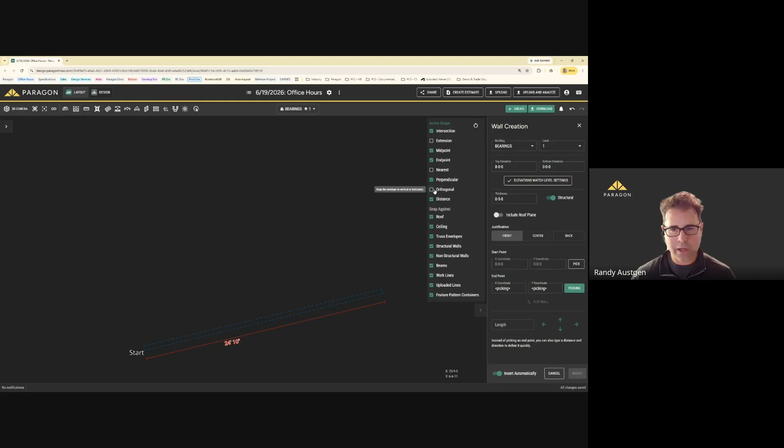So we'll get started by just creating some walls. And note here, there's a lot of new functionality with what we're looking at today. And we can see that when we start with a wall input or a beam input, it comes in having the start point anchored. I happen to be in ortho, so you can see me pivoting. We've got the dimension here on the active dimension. So if you just want to go to 15 feet and snap, you can do that.

But we're going to free form some of this, or just kind of create some walls just for the sake of today's session. And I'm just going to start off by doing some conventional wall input. So I'm hitting the right arrow key on my keyboard. That's going to take me to the right, and we can see it just input that automatically.

And what I'm going to do next here is I could keep drawing these things in, so that's all good. I can turn that off, and now I can say I want to go up 10 feet and enter. I can take this left 30 feet, enter. So that is the direction and distance. That's what I'm doing, and that requires an enter key. So down 5, enter, and so on.

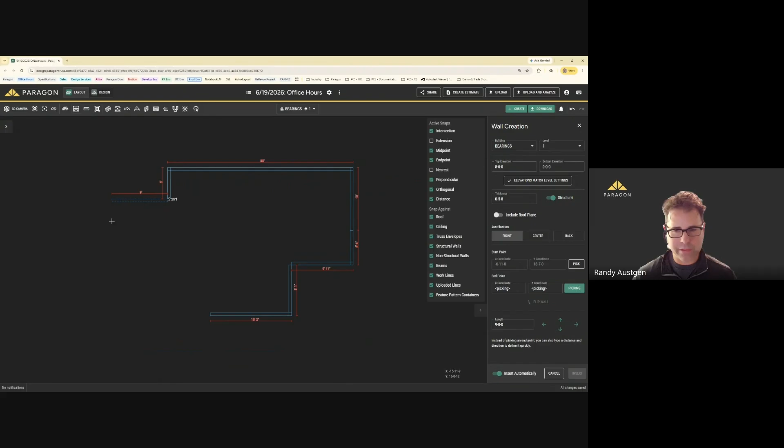Okay. The next thing that I'm going to do here is to turn on the insert automatically. And this is going to change workflow a little bit. So here, notice I have the values populated in the length field. And I'm typing on my keyboard 20 feet. And as soon as I hit a direction, such as the left arrow, it's going to place that. I can do 20 feet and hit the down arrow, and it's going to place that.

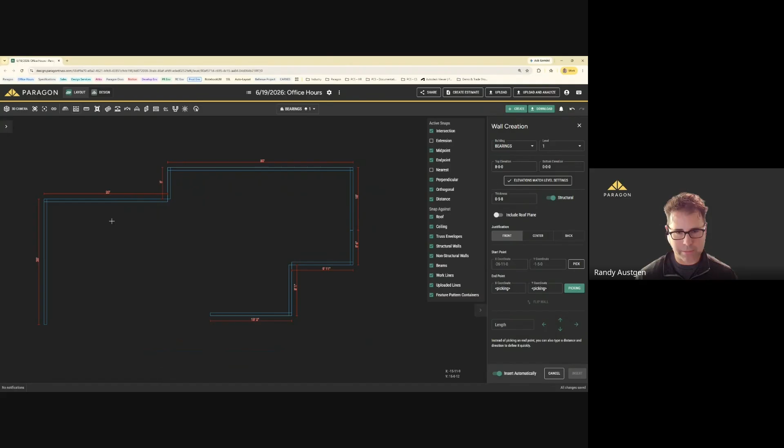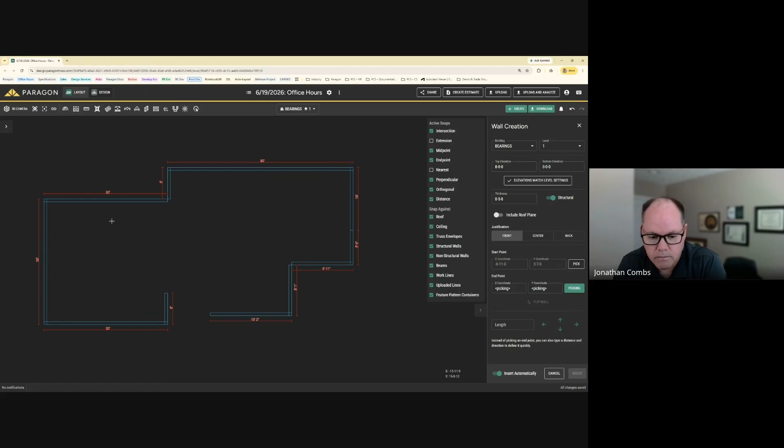A note to add there with Randy, as soon as he starts typing, that length box becomes highlighted, and the values you start entering go in that box itself. You don't have to click in there, you don't have to tab, you don't have to press enter. As soon as you start typing, that length box is filled with the value that you're typing in. And then as soon as he presses the arrow key, both of those pieces are satisfied with a length and a direction, and that then sends that wall or the item that you're creating in that direction with the value that you entered in. Great point. Thank you, Jonathan.

All right, so now we've got just a hodgepodge of walls here. This is messy. Here I'm going to actually make use of the snap points. I can hover above here, snap there, and so on. So that's all good. And I clicked escape once. Okay, and you can see that it relieved my cursor from that previous endpoint, and now I could start somewhere else. All right, so that's a huge step in the positive direction here.

I hit escape again, I can come up here. I can pick, so those are a couple big items there. If I hit escape again, it's going to remove me from the entire input session. I'm going to do that again here, and there you have it. Next I'm going to re-enter wall input mode. I'm going to turn off those dimensions.

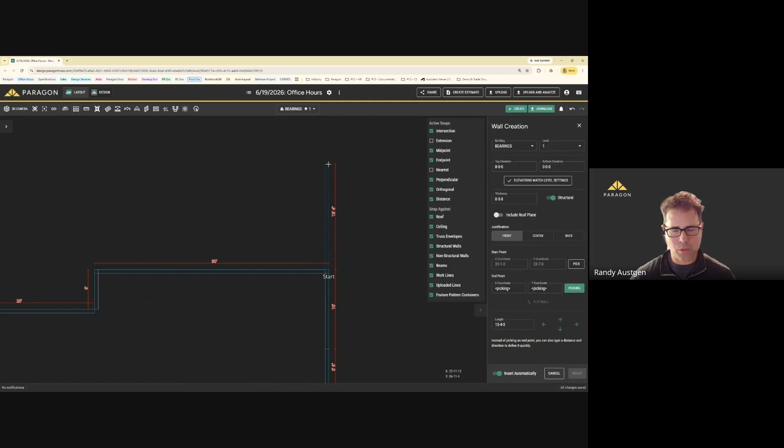And I'm gonna just drop in a few walls up here, just free form. And next I'm gonna hit Control Z to undo, and you'll see what happens here. So undo, it's gonna remove that last point. I'm gonna undo again, take me back to that previous point, undo again, it's gonna take me back to that origin. So some additional improvements around that.

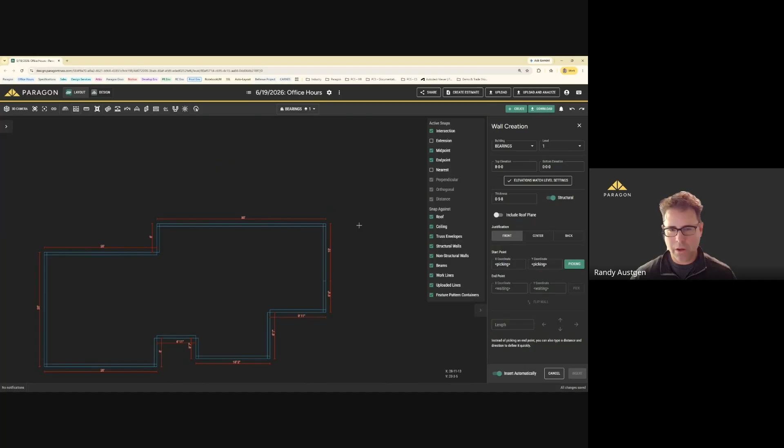All right, I hit escape. I'm gonna escape again, and that's going to get me out of the wall input mode. All right. The next thing we're going to touch on, we're going to drop in a few bearings, a few beams. We'll do some drop beams and some flush beams.

And in order to have kind of a snap point for my beams, I'm just going to extend this wall through. So as existing users know, we've got the ability to trim and extend. There's a really nice hotkey for that. You hold down Shift on my keyboard, and I can hit a cutting edge. Here I hit that as the cutting edge. So that's pretty cool. I'm going to undo twice. That was Control Z, Control Z.

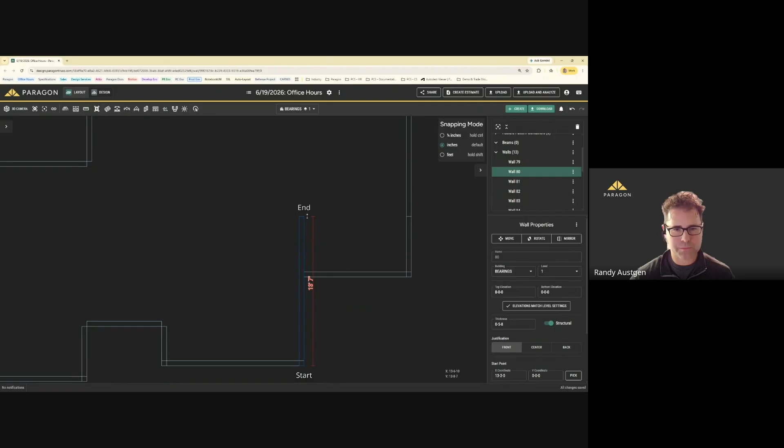And there is some new functionality here that was recently introduced, and that's going to allow me to stretch the end of a wall. You can see I use this reference point there, right? And it's recognizing that. Breaking that up, it's recognizing that, and so on. So you've got a few tools at your disposal.

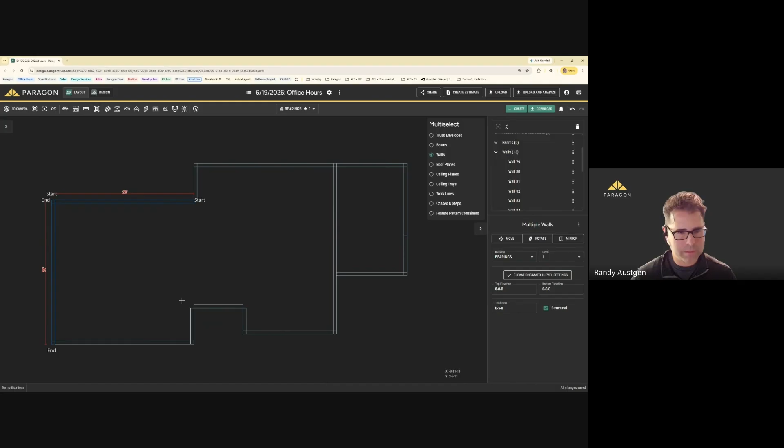And actually, before I go and put in the beams, I'm gonna show this other one here. It's these interactive editing tools. So we just showed how to extend or stretch a wall, if you will. What we're gonna do next here is we're gonna take those 1, 2, 3, 4, 5 walls, and notice the cursor is going to change from the crosshair to a move. And what this is going to allow me to do is to move chunks or multiple entities, one or more entities, objects. I can just move them freeform.

Now it's freestyle, and you say, what's the use case for that? Valid question. But what I can do here is I can actually go and piece these things together. See all of those different references? So I have these snap points all over the place. So I could do this and so on. So I think that's pretty neat. I'm going to actually align those, and then I can clean these things up. Again, using some modification commands. So again, really easy to clean things up there.

All right, back to where I was going, which is beams. So we're going to put in some drop beams. Here, let's call this a front porch or something like that. So we first define the beam type. It's a drop beam. The top elevation is at 8 feet, which is where I have the top of the wall. If I wanted that beam to be 1 foot, I could do that. We have plies and thickness as well. So if you don't want to do the math, and you've got a 1 3/4 inch, a 3-ply like LVL or something like that, you could do that.

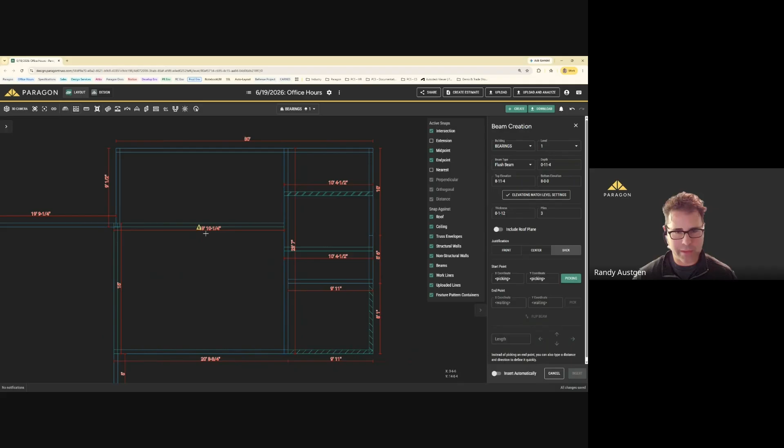Okay. So I'm actually going to get rid of those 2 beams that I just dropped in. I'm going to drop that. And let's take a look at this in 3D. So we've got our drop beams here. We've got our flush beams there. We've got additional visibility controls. We can see now we have control of beams, solid beams, and hatched when you're in 2D.

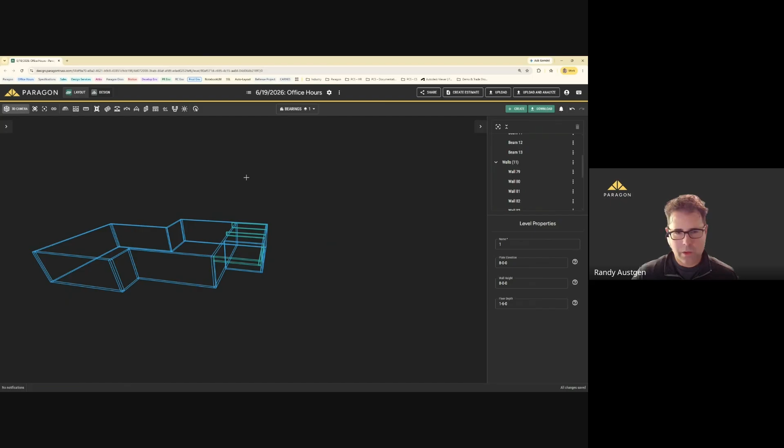And then the walls, I'm not sure if 2 months ago this was available or not. We released this relatively recently, but we have different visibility and controls for load-bearing walls or structural walls versus non-structural walls. All right. All right, I'm gonna reference my notes here, folks.

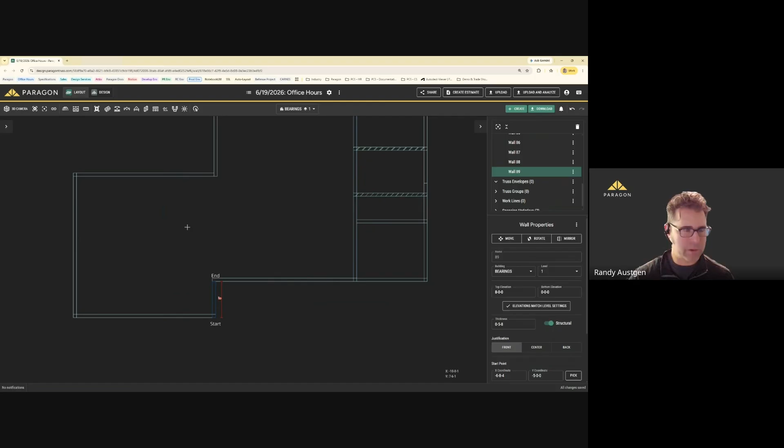And again, I mentioned this in the intro, but instead of having the left point and the right point, we now have start and end for our walls and our bearings. We touched on the length and distance versus being able to snap, using direction, distance, and hitting the Enter key versus doing the insert automatically. We reviewed the Escape key, how to really navigate around the model quickly using the Escape key to release your snap point or to exit the input or creation session. Undo, some big improvements with undo, and then we've got our flush and drop beams.

Okay, so before we move on to our next topics, do we have any questions around anything that you just saw there with bearing input, and by bearings, walls and beams, flush and dropped?

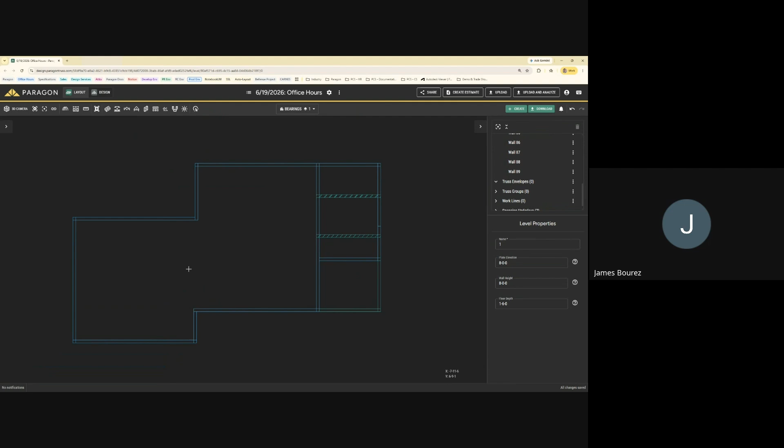James. Yeah, when you have a building that has multiple elevations on the same floor, we have a lot of 2-story houses that have all kinds of different plate heights. When you're putting in the bearing, when you're doing the level elevation, you have a certain plate height on the level, then you have multiple different heights with the walls. What is the best way to put that in? Do you want to put the lowest ceiling height for the level?

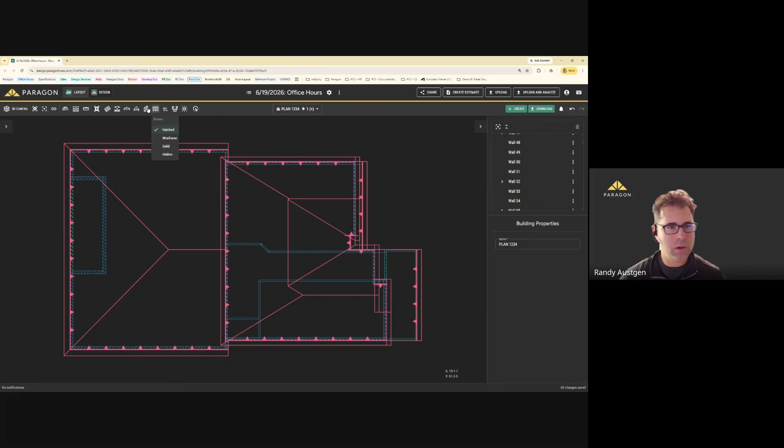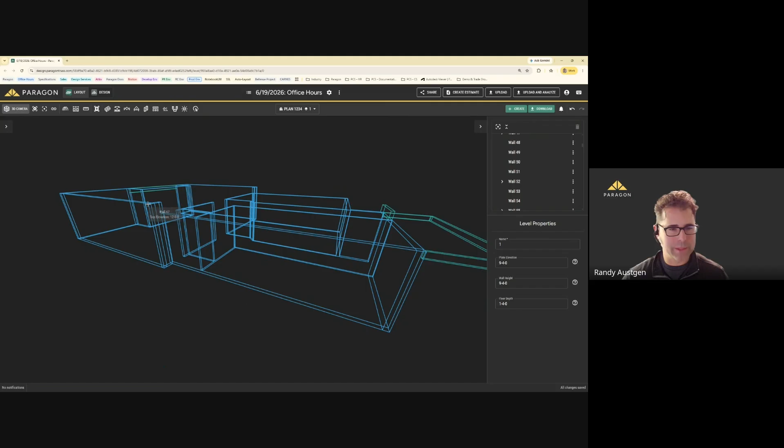Yeah, what I would typically do, and I do have a multi-level building over here. I'll try to not let us get too far into the weeds here. I'm gonna hide the stuff we don't care about right now. But what I would do is I would define the level plate elevation as the most common on that level. So that's what I would start out with. Actually, this is a good example. I'm gonna turn off those feature pattern trusses too. So this particular layout we've got some 10-foot walls, 12-foot walls. We've got 12-foot walls over here, and then the majority of them are at 9'4".

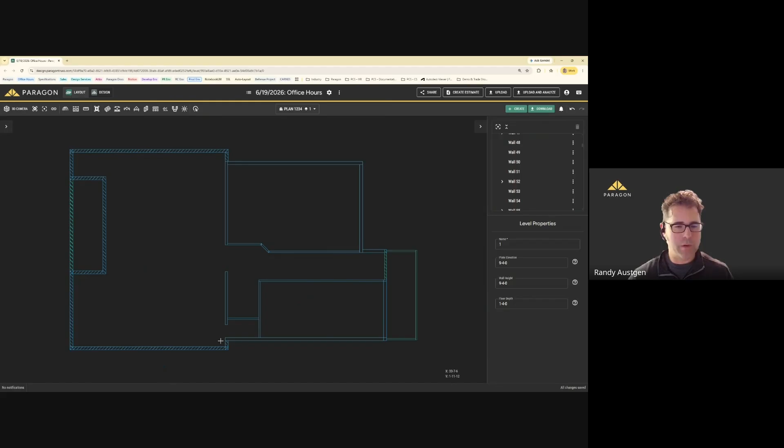So what I've done here is I've defined the level properties with a plate elevation of 9'4", and again, you'll find what is most efficient for you. What is most efficient for me is I will put all of the walls in at 9'4", and then I'll go back through and select the walls that need to have a different plate height. I'll just select them and then change the property. That's what I find most efficient. And then viewing it in the hatching visibility allows you to QC yourself and just double check.

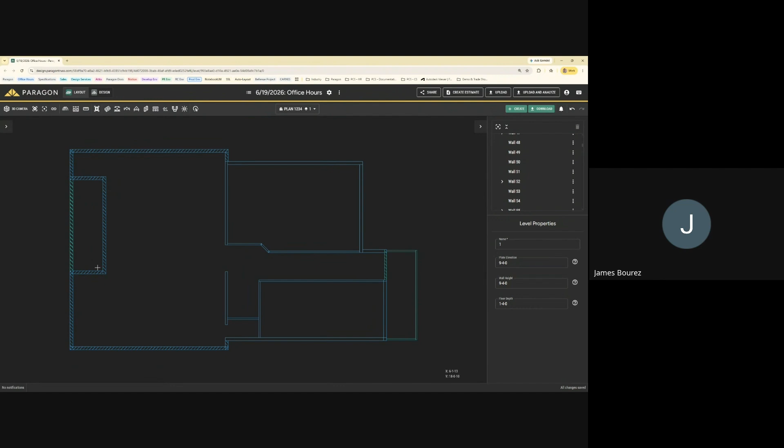Okay, and you select multiple with the Shift key? Control. So, no, I do not have Control selected right now, and you see what's happening? I hold down Control, and there you go. Notice it didn't select that beam back here. Okay. Thanks. Yeah, absolutely. Great question. All right, any other questions here before we pick back up?

All right, keep them coming. Next, we're going to look at some of these smarter snapping controls and snap settings. And I gave you a little preview of the interactive editing, but we'll cover that a little bit more here.

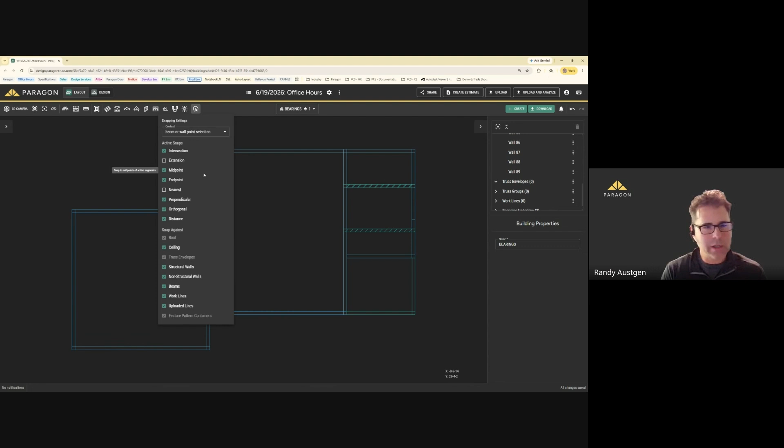All right, so snap settings. We have a new snap setting icon up here. So what does this actually mean? So the snap settings are, I don't know if you call them, kind of predefined contextual snap settings based on what command you're in. That's the contextual part.

So the active snaps and the snap against should look pretty similar to whenever you're in any type of input mode, right? We're used to having these come up over here. But what these are, so again, I'm in wall creation mode. These are contextual. So I'm in beam input mode, wall input mode, I think, wall creation mode. And we can see there are these different, I don't know if you want to call them styles or preset groups that just predefine what snap settings are available and possible.

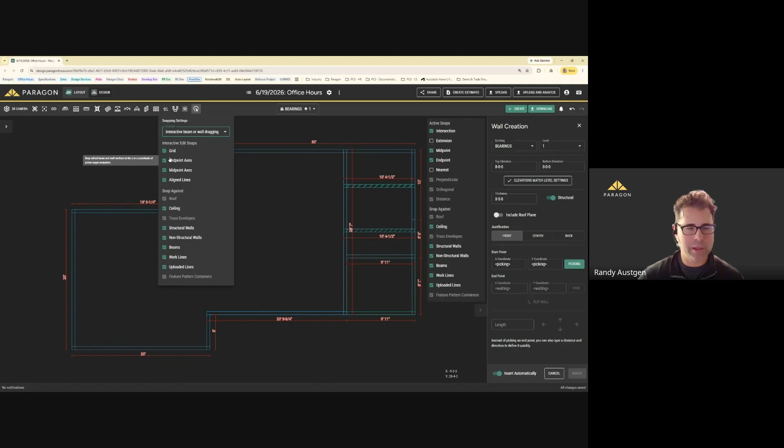All right. So I encourage you to work within this area. I'm going to show you an example. And this is going to be for when I'm in an interactive beam or wall dragging mode. This is the type of thing that's going to be available. I'm going to select the grid, and I'm going to do this in 2 stages. Okay. So we're going to go back and do this thing. I had the grid. The grid is available as snapping options.

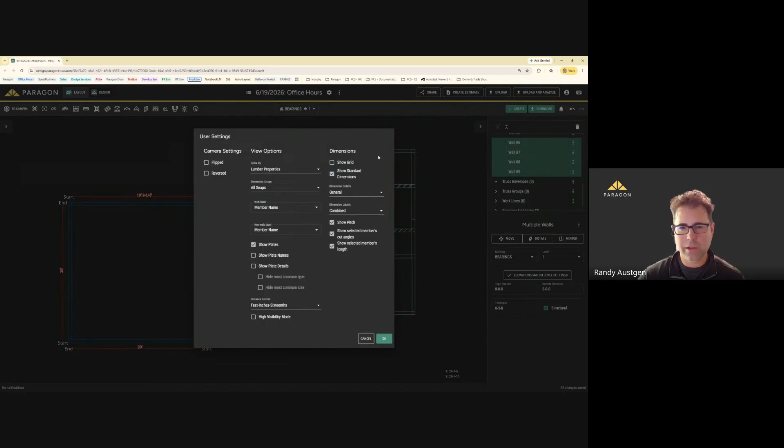So it's going to be a little tough to see here, but I'm going to actually turn on that grid, and maybe it's going to be a little easier to see. So if you can see, I'm trying to move my mouse incrementally, and it actually finds a snap. So it's snapping to that grid. Okay. Versus if I turn off the grid, and now it's not snapping.

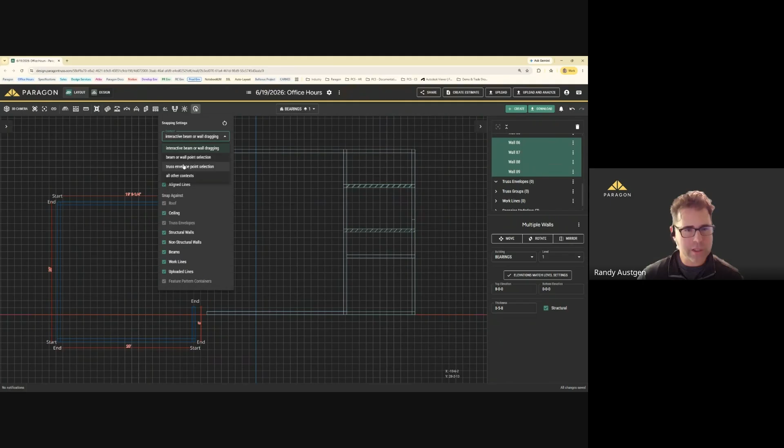All right. So that type of functionality is going to be available to you depending on, I don't know if you call it mode or what context you're in. So I'm in interactive beam or dragging mode, and then we've got the beam or wall input or insertion, creation, truss envelopes as well. And really the intent behind this is that it provides you more control to help you quickly find the snap point that you're looking for and reduce the opportunity to inadvertently snap to something.

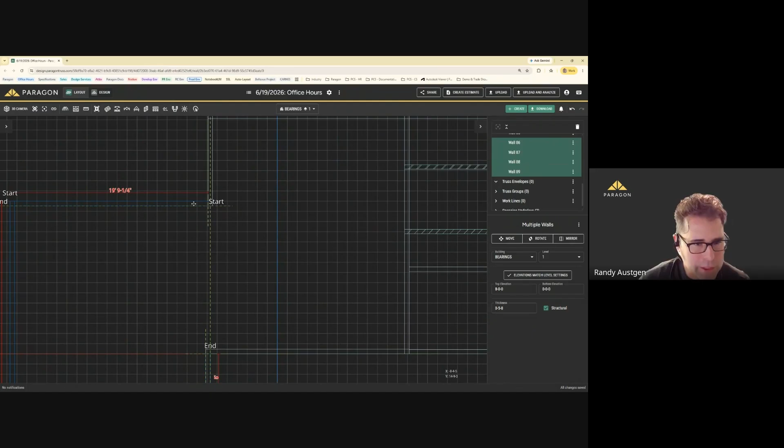All right. So there we are. Let me see if I can get that a little tighter there. And then we're back to where we were before. Personal preference, but I prefer working with the grid off. I find it a little noisy in the day-to-day.

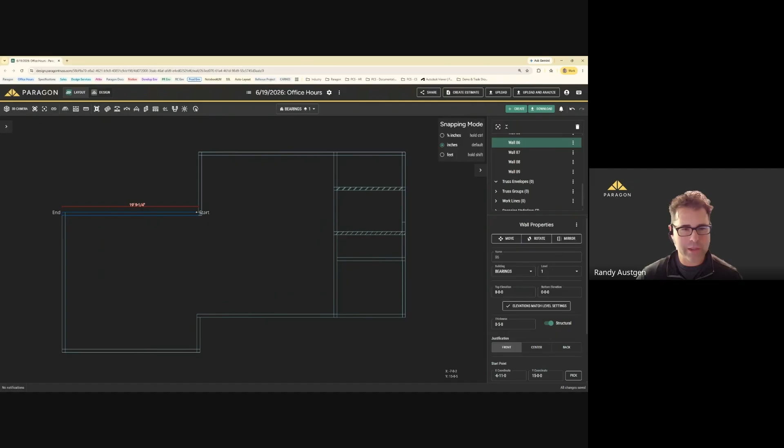All right, so I touched on a little bit with the snapping. Again, I showed this before with, I'll say, the stretching, adjusting wall lengths, and you've got that active dimension. So that's pretty neat. Adjusting a wall position. Again, I can move this down. I'm going to see if I can actually get this to align.

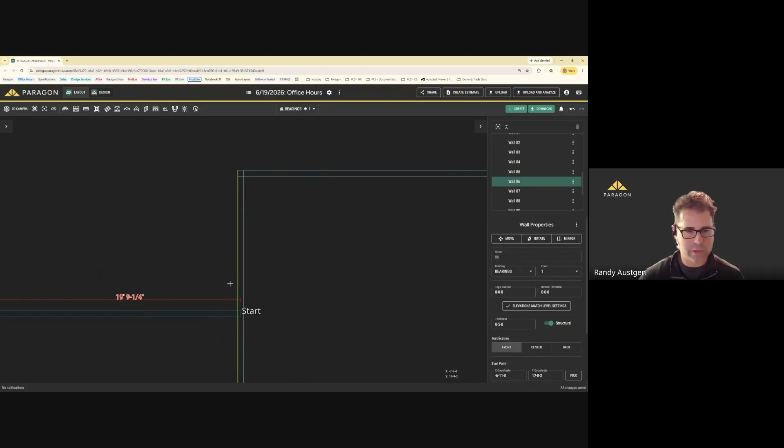Oh, having a hard time getting that to align, but really, I'm gonna scratch this itch of mine. Because I'm crazy, I need these things to align exactly. And so I can move that over. Again, I'm just freestyling a few changes here, 0 to 12. And then you could select this one, either drag. I'm going to select this one and trim it. So holding down Shift and trim, and so on.

All right, so a lot of great tools, and you'll find in some situations using the extend by shift clicking is going to be faster or more efficient. Dragging might be in some cases. Here we go. I've got 2 walls selected right now, and I can extend those through. What I haven't tried, this could be fun. I was wondering if that was going to adjust both walls. It does not. And there we go.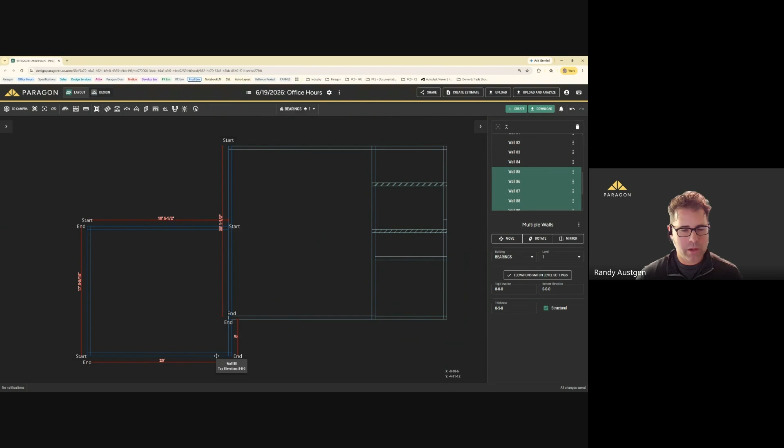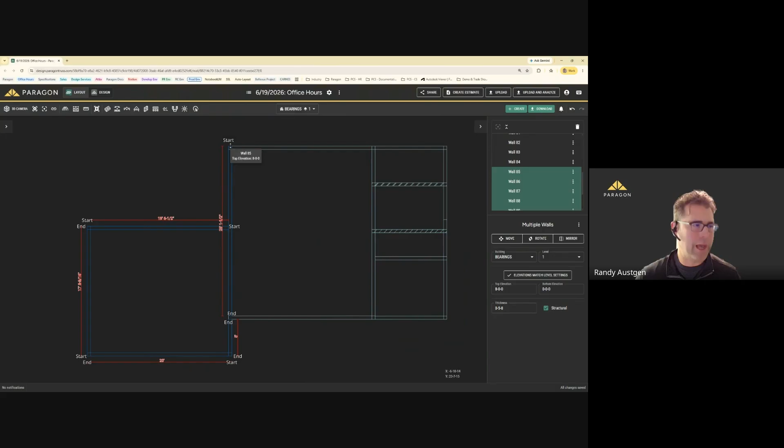So again, I encourage you to explore some of the different tools. Multiple ways to do certain functions, such as moving those walls, extending the walls, but you'll find what works best for you and your specific scenario. One word of caution I have with these interactive editing tools is be very mindful of the cursor type. Right? So when I'm in a standard mode, selection mode, etc., I've got just the crosshair cursor, but as soon as it changes to move or to stretch, if you left click, things are going to happen. All right. So a word of caution there.

Okay, so again, we covered the smarter snapping controls, the customizable snap settings, allowing you to snap to certain objects, etc., and then the interactive editing. All right, any questions around that?

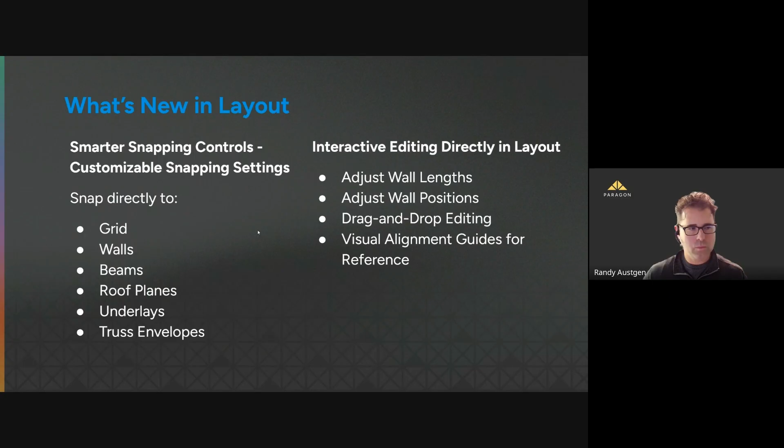Okay. All right, a few new items. We've had a long-standing request in our development backlog to make work line input more efficient, and so we're going to be covering that. We've taken some of the best things from the reference line workflow within design mode, and we've implemented them within layout as an initial implementation, an initial step.

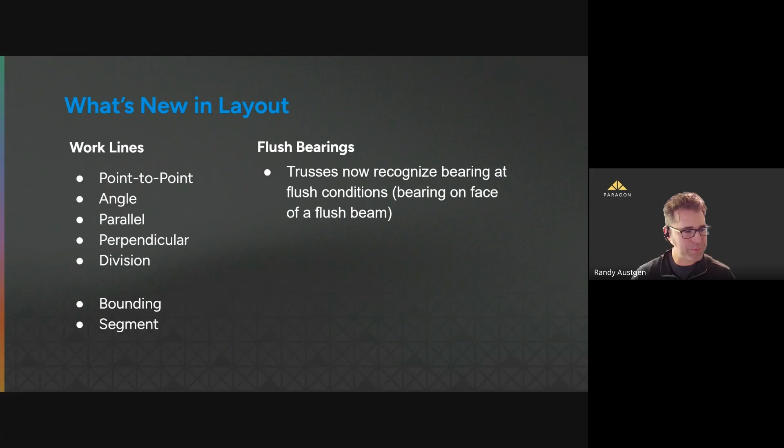There's certainly some more opportunities to improve and refine the work lines in layout, and we're going to be taking advantage of that, and you'll see continued changes with work lines to make it smoother, fewer mouse clicks, those types of things. We'll go ahead and explore some of those. All right, so as with our typical workflow, I'm going to right click and create a work line, or you can always go up here to the create option.

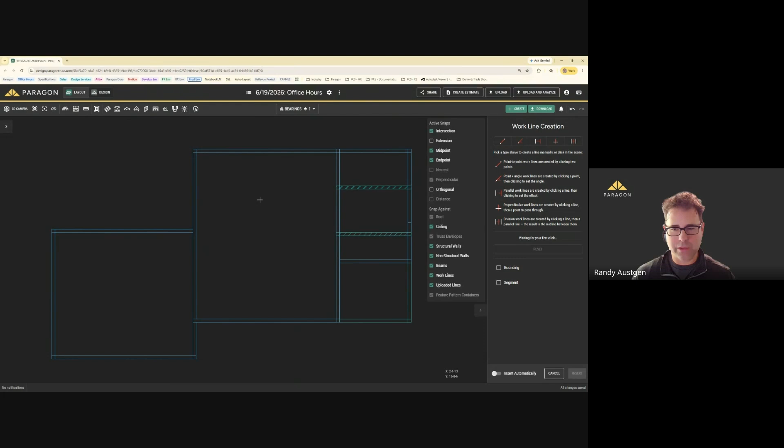So when you are now creating a work line, you've got a new dialog. The right sidebar, the right panel, is very different than it used to be. We've got these different modes: point-to-point, point and angle, parallel, perpendicular, and division line. So again, taking some of the functionality from design mode when you're putting in reference lines, and mimicking those here. With any of these input types, you have the ability to use bounding, and some of them you can use segments. I haven't selected anything over here yet.

And note that I have these snap points. I can either define an edge, or it'll take me to a snap point itself. That's a midpoint intersection. And that allows you to get things kicked off without clicking any buttons. So here we are, I'm just going diagonal with a point to point. I could do a segment. This is going to get really messy.

And here we are, I just hit insert. Notice we also have the insert automatically here. So I'm going to do insert automatically, define a new start point, and I'm going to just go here, and it automatically puts that in when I click the endpoint. And so on. All right, so that's an improvement right there. We stay in a continuous input mode. It doesn't leave the work line command after you're done defining.

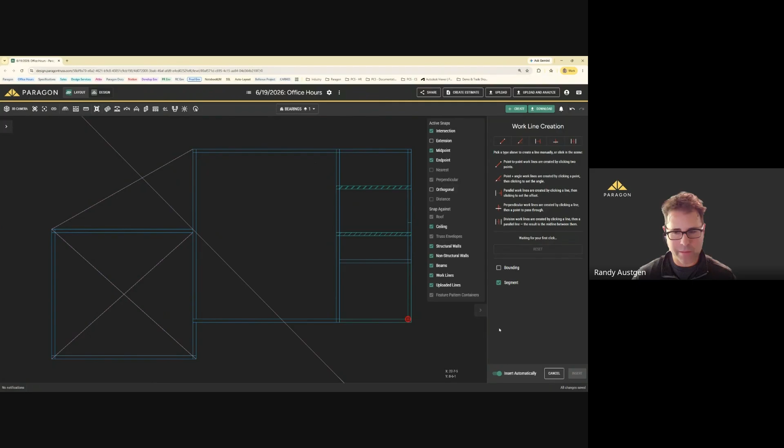All right, so next, let's go explore some of our tools. So that was point to point. We've got point and angle. Excuse me, it didn't get the point and angle, and I didn't even click that yet. So you can see you've got your angle here. So if I know I want to come down at a 45, there we are. I could just drop that in there. I'm in insert automatically, so just drop that in there. That's good. We've got our offset.

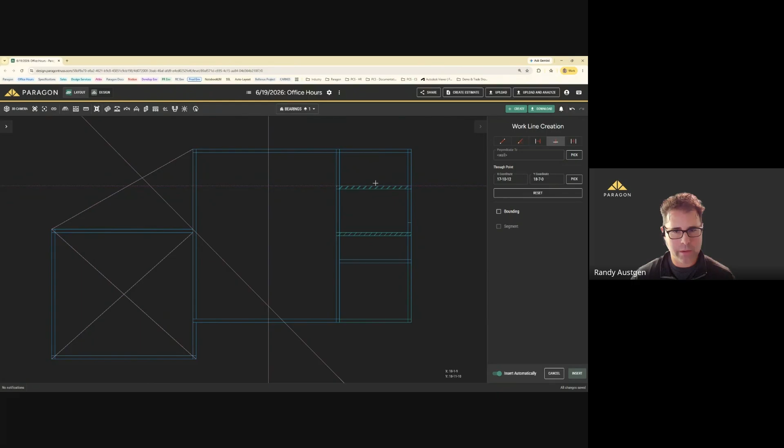So this is similar to what you're previously used to. We'll do some refinement where we're moving your cursor for you. So if you wanted to move this over 10 feet, hit the right arrow, and there you are. There's your line, and so on. All right, so we've got perpendicular. If I want to place a line perpendicular here that is in line with this beam, I can do that here and insert. There we are. So now I've got that line there.

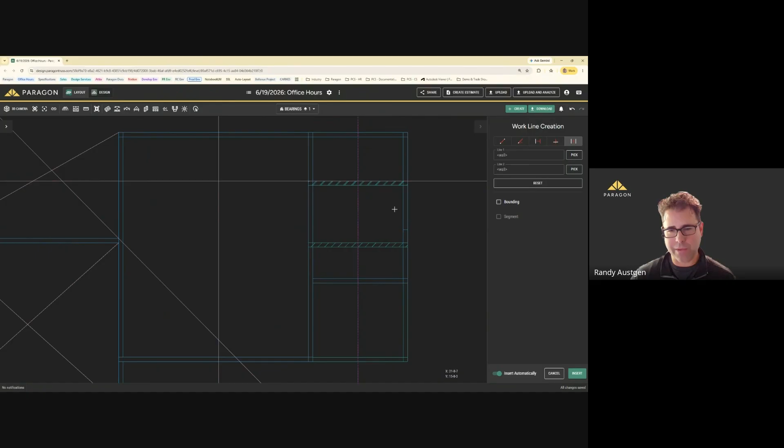And then we've got our division line. And this is borrowing the functionality again from design mode, where we're able to specify what kind of a start and end. And this is going to divide it in two. Again, in design mode, you're able to use the plus and minus arrows to determine how many divisions, if you will, to place work lines or members. And so that type of functionality will continue to be enhanced.

Okay. So there we are. We've got a whole bunch of work lines that I'm likely going to get rid of next. All right, so here we are, work lines, see you later. And the last couple things I want to do here with work lines, I'm going to use the bounding and segment to next demonstrate some of the flush bearing improvements. So I'm going to define bounding and segment. I'm going to define that here.

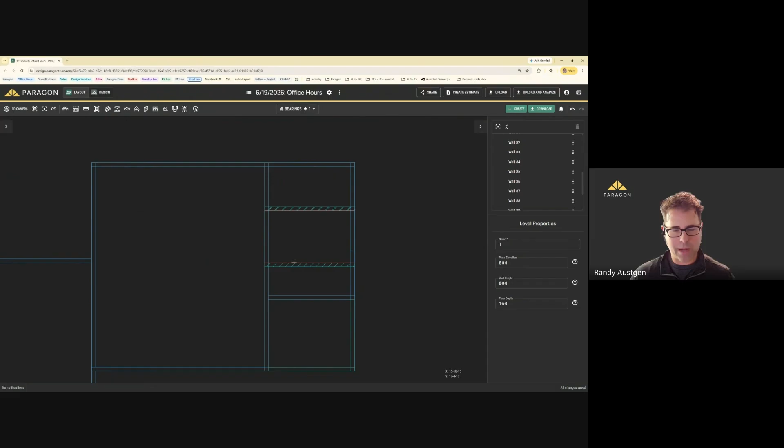And I'm going to do one more. And insert. Again, I can use the insert automatically, or the Alt key. Holding down the Alt key when you select an endpoint is going to keep you in that continuous mode. All right, so I've got my bounding and segment reference lines here at the faces of those girders, those flush beams.

All right, any questions on anything we just covered there or adjacent?

Okay. All right, for the next demonstration, I'm going to actually demonstrate some of this flush bearing recognition and improvement around there. So for existing users, it's long been a challenge where if you had trusses, for example, that were spanning between these two flush members, that it wouldn't recognize any bearings whatsoever. And therefore, you found yourself having to create false bearings and then editing those things when you're in design. So not ideal, several extra steps, and we have improved that, and we're going to continue to improve that as we continue to enhance functionality.

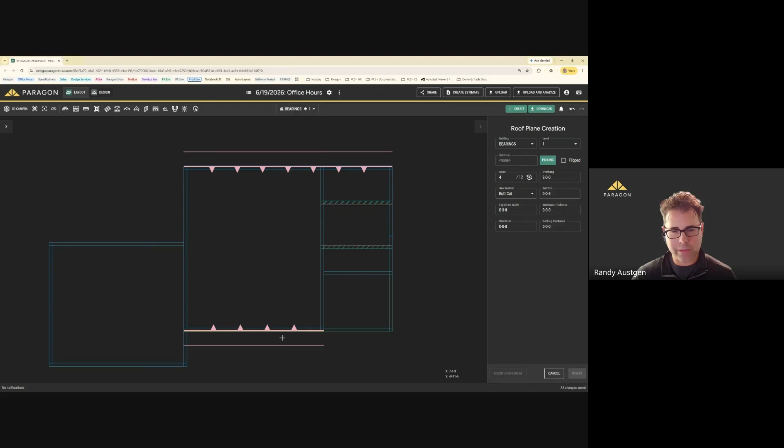So in order to demonstrate this, I could put in some floor trusses, but in this particular case, I'm going to drop in roof planes. I had mentioned holding down the Alt key when performing certain commands. I'm going to do that here. So I'm going to hold down the Alt key, and it's going to leave me in this continuous input mode. Coming back down here, there you have it. While I'm at it, may as well go here. Great. So I can hit escape now. And there are my planes.

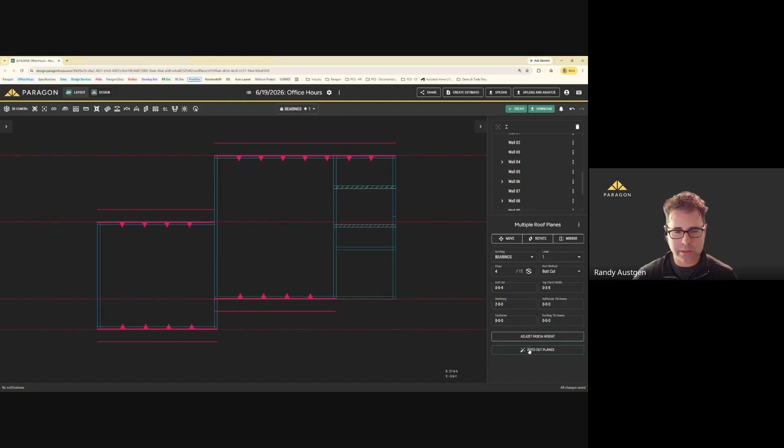We continue to make improvements around auto cutting. And this will be interesting to see how it interprets this. I don't imagine it's going to get it right the first time, because there's some tricky stuff there. So it did a pretty darn good job here. Got this, but we got that weird jog here. So I wouldn't expect it to get that dialed in, but it's pretty good. It did do a pretty good job. So I'm going to work with that for now.

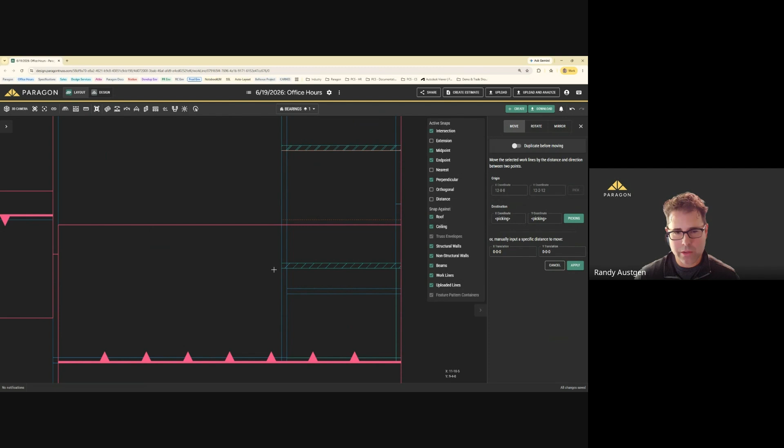I definitely don't like what is going on for this demonstration where I have that flush beam. So I'm going to use, again, some of those editing tools that we have. And I'm going to move this down. I'm going to move this one down. I'll put it right there with that one. There we go. Oh, I overlooked that. So we did not implement the work line movement with the interactive. That's just for walls and bearings. But what I can do here is I can move that work line now to that new location. So I'm just going to move that over here, and there we are.

All right, actually now I've got to change this, get that beam back over there, and I'm going to get these walls over there. All right, I'm going to drop in some truss envelopes. And let me make sure to turn those on. And there's my truss envelope. And notice it's being bound by the reference lines, those bounding reference lines on the face of those flush members. If I place it up here, it's still bound.

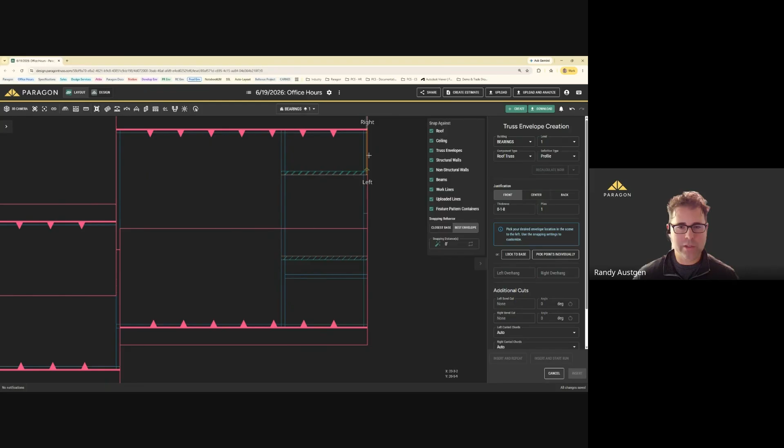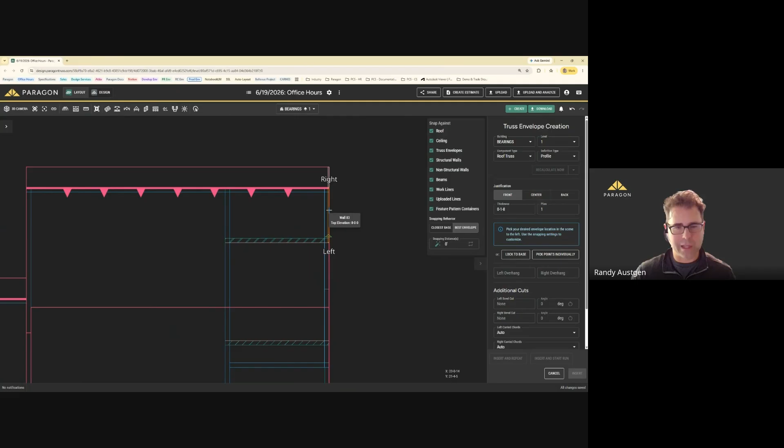Notice here that this roof truss envelope that I'm putting in does not automatically recognize the rear face of that flush member. So we don't have that 3D geometry detection yet, but that is something that we're going to be looking to improve. So make use of those bounding work lines to control that, or you could always place it and then use the trim, extend hotkeys, the shift select to finalize your left and right ends, etc. But the purpose of this particular demonstration here is to show off the new functionality of the flush bearings.

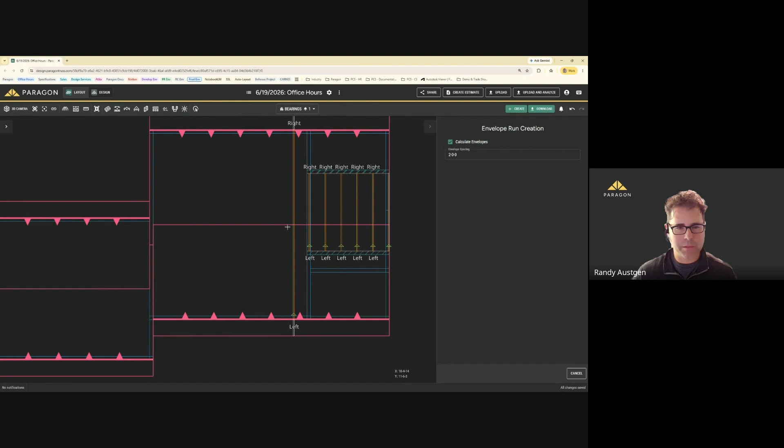So I'm going to just click there to place that gable. Having a hard time with my words today. I'm going to bring this out. And then look, as soon as it gets beyond those bounding work lines, it's now going to place these trusses on layout and so on. And I can keep this party going. All right. And there we have it. Again, if I wanted to continue to fill out this, I can do this, start run.

There we are. While those are selected, I'm going to get that gable and trim it back to that face. Here we are. Again, I'm just freestyling, showing you some ways to be very efficient. I'm going to use the mirror command. I'll mirror that about the ridge line. It's going to duplicate that existing. There you are. While those are selected, hold down the shift key, and there you have it. All right.

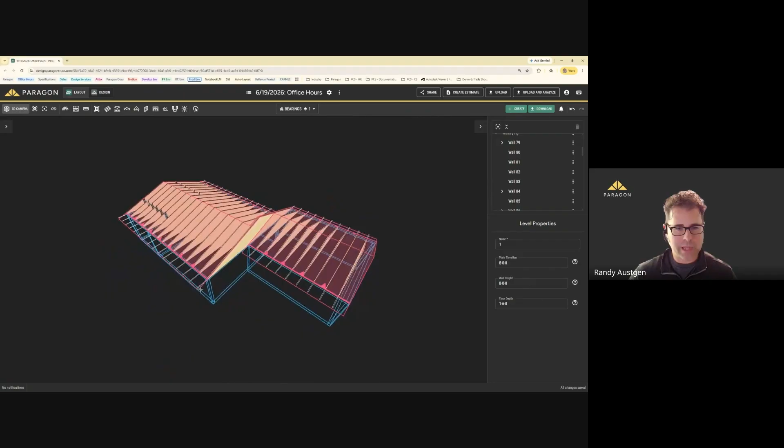Let's take a look at this in 3D. Oh, we'll take a look at that in 3D, and then we will end up designing those components at some point. But first, let's address James's question. James, what do you have?

Yeah, if you wanted full span trusses there, would it recognize the beams and put beam pockets in the trusses? Not with what I have right now. So currently, the bottom profile of a truss is defined by the bearing elevation. So defined by a wall, essentially wall or beam, and also ceiling objects, ceiling entities, right? So you've got a tray ceiling or a vaulted ceiling or even a flat ceiling if you step it up.

Those types of things. So it's not going to auto detect that in 3D yet, based on the 3D geometry yet, right? And the same thing applies to if you have a ledger condition, it's not going to automatically notch the end of that truss. But those are all things that we plan to improve upon to reduce the amount of additional plane cutting and plane definition and those types of things to automatically step up at that flush girder.

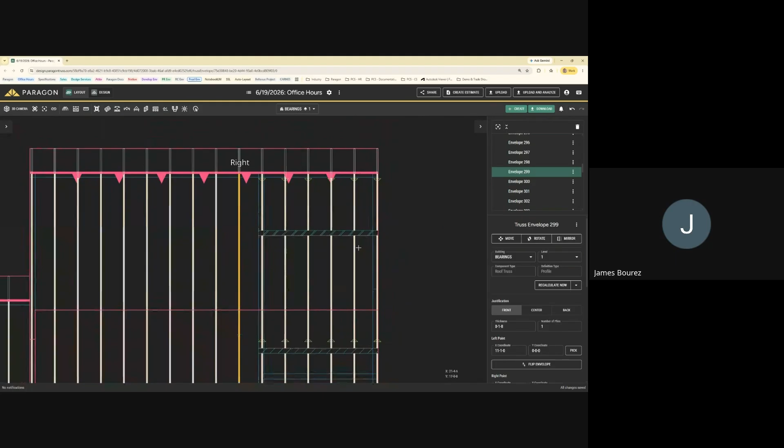So how would you do it now? Have to cut ceiling planes in the shape of the beam? You got it. So I would do something like this. I would put in a flat ceiling plane here, insert and repeat. I would put another one here.

And this is going to be fun. You don't have to do it right now. But... Wait, no, we're doing it, James. Oh, I missed that one. Let's go.

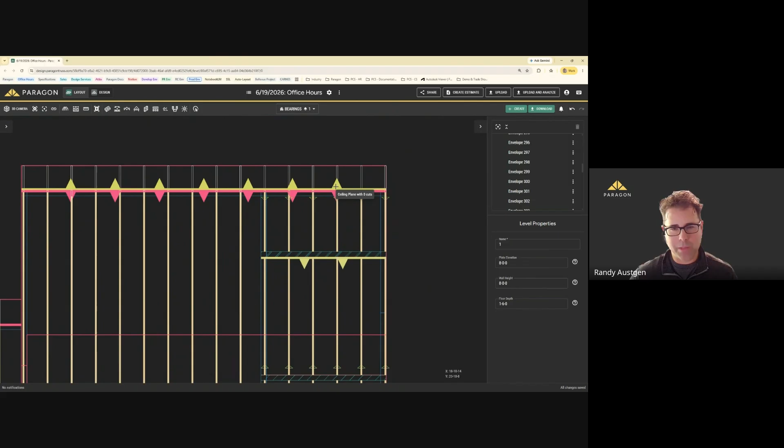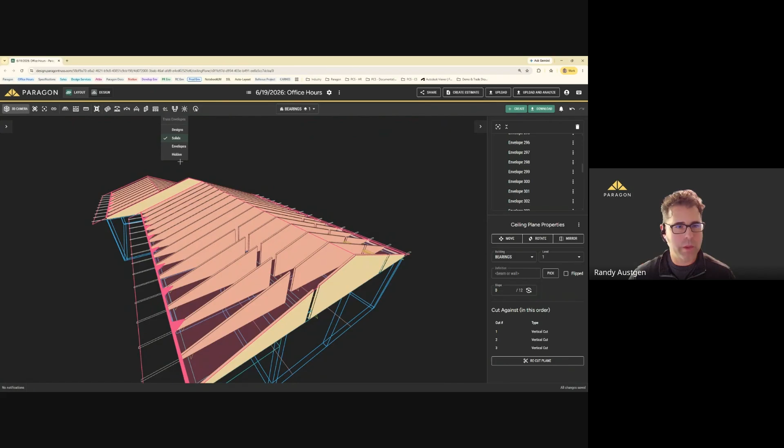So it really doesn't matter how I'm going to cut this thing in here, but what I do know is that I want to take this one and we'll cut that plane. I'll bring it up over. I'm holding down shift. Probably didn't need to do it at the gable, but work with me here. What I'm interested in is where it actually placed that, because it was a flush member, whether it placed it on top of that or on the bottom. This is great. That's exactly what I wanted it to do.

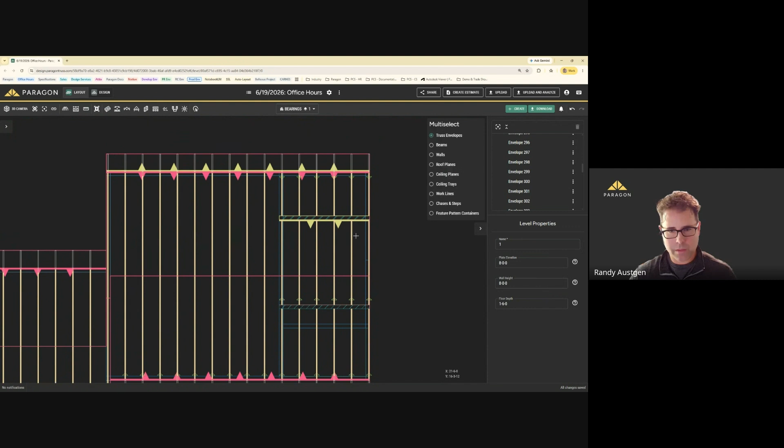All right. So now what I can do is we'll take that envelope and I'm going to do a solid. Come on, fella. Yeah, I'm going to leave a few of these in here. I'm just going to grab these and bring them on over. Okay. So that did not automatically pick it up, which I did not expect it to. What I can do here is I can take this, and it's going to be interesting to see if this works without a vertical ceiling plane.

And I want to add a series of bottom cuts. So adding bottom cuts from left to right, the triangles here on the truss will represent the left end. So I'm going to grab that 8-foot ceiling plane that I didn't cut and I didn't flip it, but it really doesn't matter.

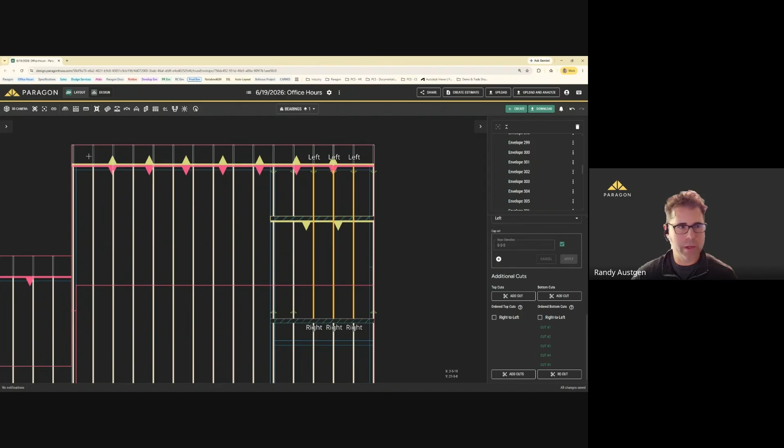So I can come here. I can hold down shift to come up that girder or that beam. I could click here to grab that raised section. I'm going to hold down shift, come back down 8 foot and finish. Let's see what happened. And there we go. Might be tough getting that one to pass. Although in reality, you got that flush beam that's actually supporting that. I am really curious as to what's going to happen when we generate these component designs.

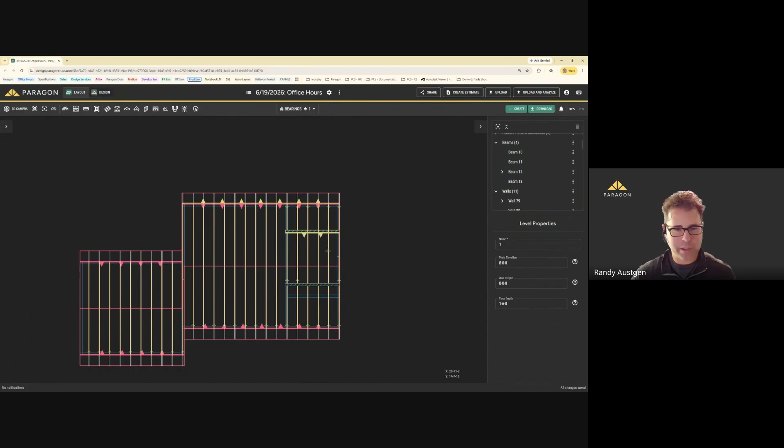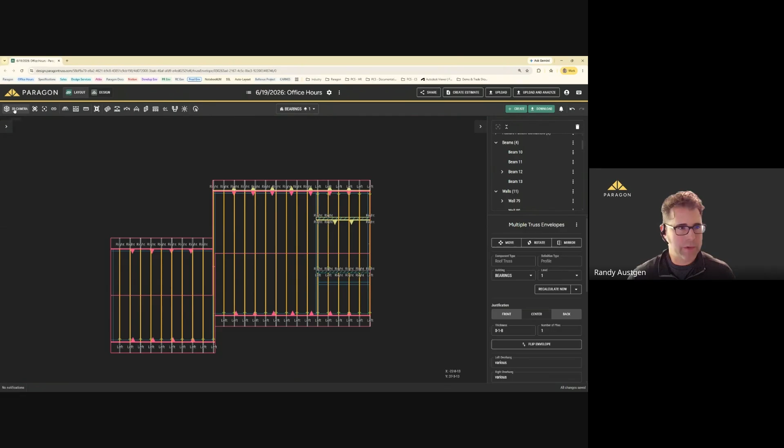Yeah, great questions, James. So the short of it is we don't automatically detect the 3D geometry of those flush bearings, but it is something that we are working toward. All right, now that I have all of these truss envelopes, I'm going to select them all. And I'm actually going to do this in 3D. We don't have any designs, and we are going to create designs. So create or match designs.

And there we have it. Oh yeah, it did its best here. That roof is not deep enough. So I'm going to cheat a little bit here. I'm going to grab these and say I want that to be an 8/12 slope.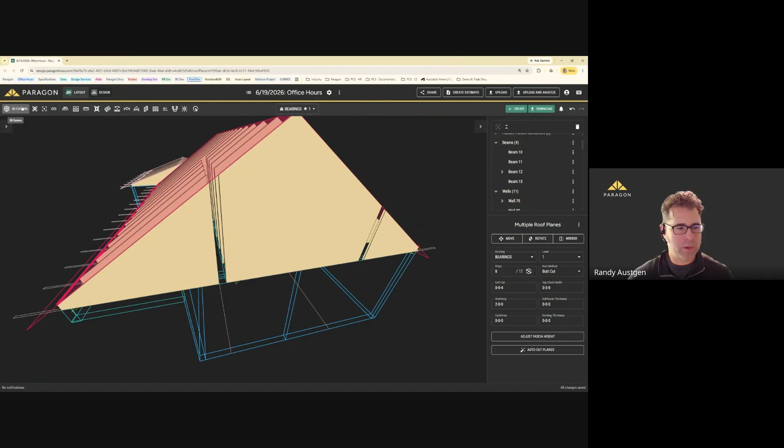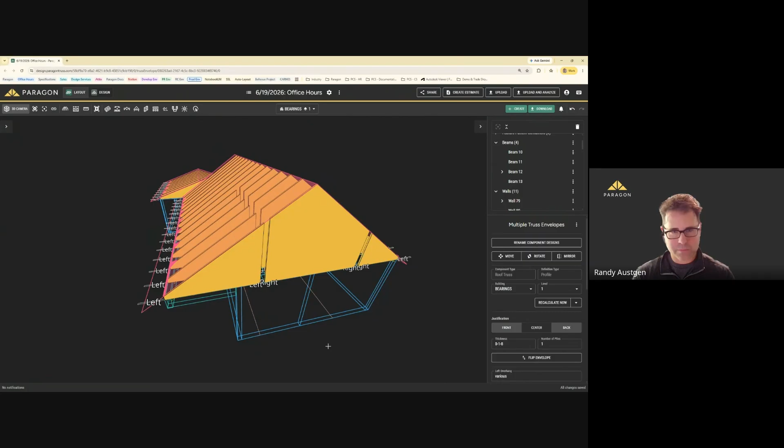Notice that the roof components did not automatically follow that new slope because those components are already designed, but the truss envelopes did. So this is a really important designation and a good example of the differences of truss envelopes versus the component designs. I'm going to select all of those. This will be fun to do in 3D as well. And we are going to generate those components, and we're going to see that all of those components that were previously defined at a 4/12 are now going to change to an 8/12. And I thought I was in that view, and there we have it.

And let me take a look at this one. Yeah, that's pretty sweet. It did pick up that bearing, so that's awesome. And then, especially for those existing users, you can see here, this is the truss bearing on that flush girder, and sure enough, it gets a hanger. So that should save a ton of extra work that you've been having to do to ensure there's a bearing on that end.

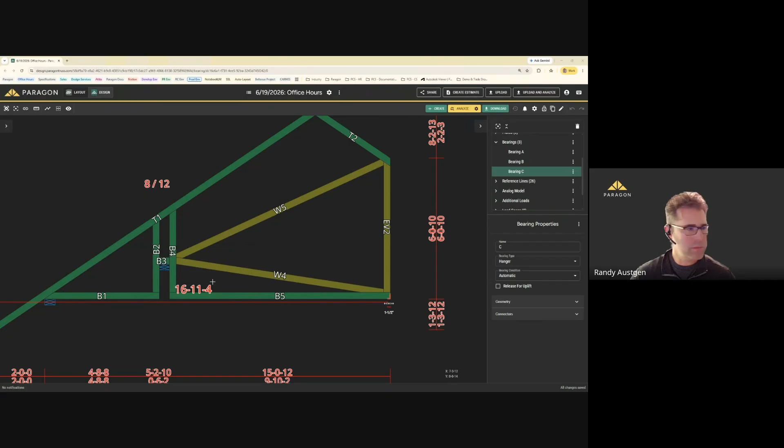All right, any questions? Okay, next thing on the list, and we got about 8 minutes left.

Next thing on the list is we've got these component filters now. Prior to this, the filter was only available in design mode. So if we were to go in and look at this, oh, here's one of those trusses that has the hangers on both ends. We could go in and look at the filters. We can see all trusses or the unlinked trusses. And so you can filter that back and forth. That's available in both layout and

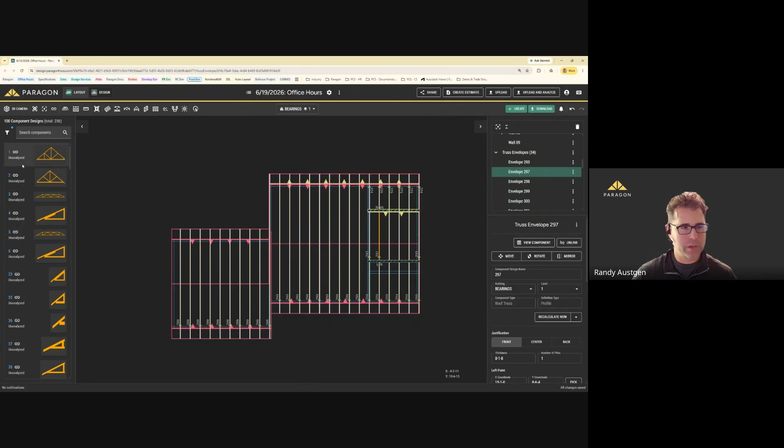design. For newer users, a linked envelope, you see this linked indicator. This means that there is a component design, so a truss design that is associated with that envelope, versus unlinked, which means these are all truss designs that don't have any relationship to a truss envelope within the layout. And we can get into the details and why that is valuable, but these are all, essentially, the 4/12s.

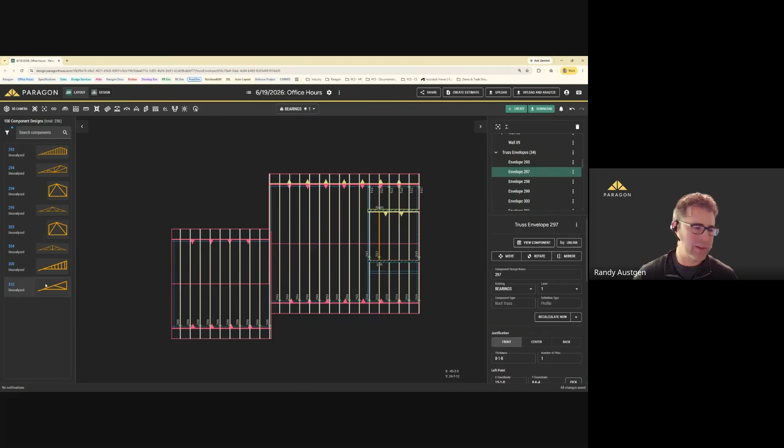And if you want to just get rid of all of those, I'm going to select the first one, hold down Shift, hit the delete key. Are you sure? I am positive. Let's get rid of that stuff. And here we are.

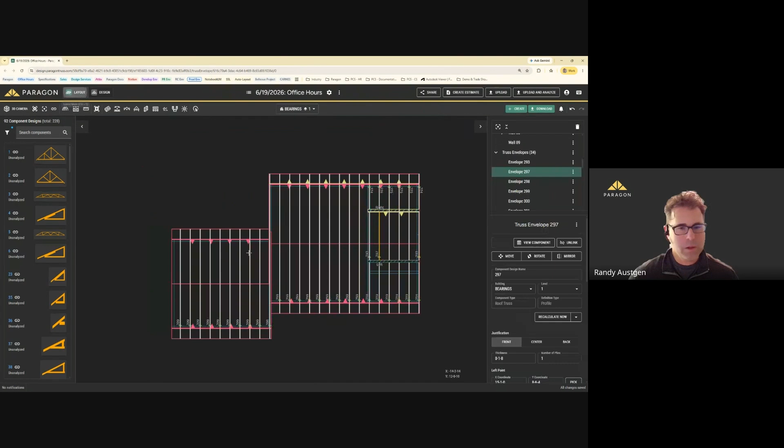Okay, here is going to be a really good example. This truss right here, I'll say interior gable truss. It's a gable in that it's on a structural wall running parallel. But if, for example, I wanted this truss to be the exact same truss as 297, what I'm going to do here is I'm going to unlink this. And I want it to be the same truss as 297. I'm going to go to choose existing. I'm going to choose truss 297. And there we are. Now those are the same designs.

All right, so that is how you take, I don't know if you want to call it consolidating trusses, but if the system does not recognize a truss as being the same, in this case, it properly didn't define them as the same because the bearing condition is different, then you as the user can make a decision and, I'll say, overwrite that, if you will.

All right, we've got about 5 minutes left. I do have a couple more topics that we could cover, but want to make sure that there's plenty of opportunity, 5 minutes worth, for you all to ask questions on anything specific that you're looking to learn more about. Yeah, Derrek. Oh, you're muted, sir. Oh, there we go. Sorry.

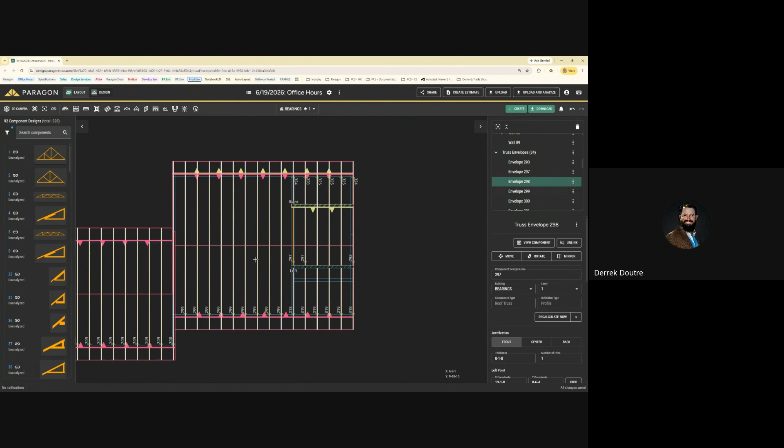Great. Yeah, we were working on a couple projects. I was wondering if you guys have worked on the ceiling planes for doing coffer ceilings, the residential stuff. Yeah, so the sloping. No, not the vault, but more of, you got 8-foot truss bearing, and then 2 feet in, they want a 9-foot ceiling raise. Okay. Yeah. So that's going to be a tray ceiling is what we're going to want to do there. Okay. And I was trying to get at whether or not that was going to be a vertical when you step in, or if it's going to be a 90. That's what I was thinking, but not using my words.

All right. So our bottom elevation of that tray is at 8 foot. Our top elevation is at 9 foot. We can define the width of this thing. So I don't know, I'm just going to go 10 and 10 for the sake of this. And I want to take this from the left and upper, because I want it to be 2 foot and 2 foot off of the inside of this. And so I'll drop it right here.

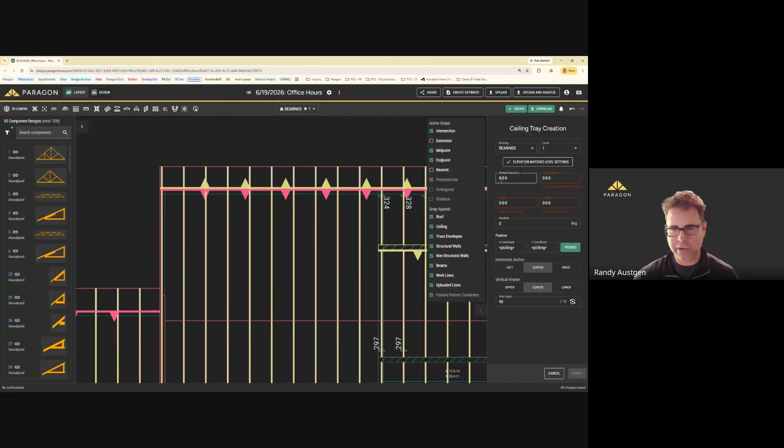And then what I can do is I could move this now. So I could do plus 2 feet. And this is going to be what? Minus 2 feet. And there you are. Oh my gosh, did I really just do that? I hit escape. We're going to try this again. 8, 9, 10, 10, left, upper. Let's do this.

So while that's selected, I'm curious if move is going to work. So I want to move that 2 and -2. Sorry, I just hit a hotkey for move, which is Control M. That's what I did there. Okay. I think that the truss design itself is probably not going to... this right there at the ridge. Actually, the bottom chord, it should be fine.

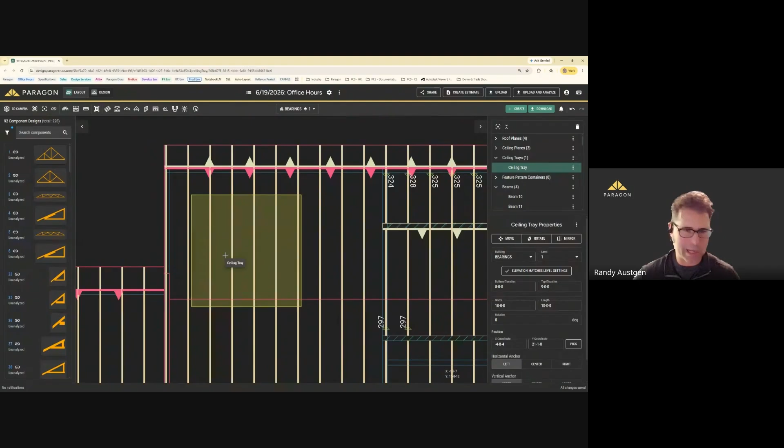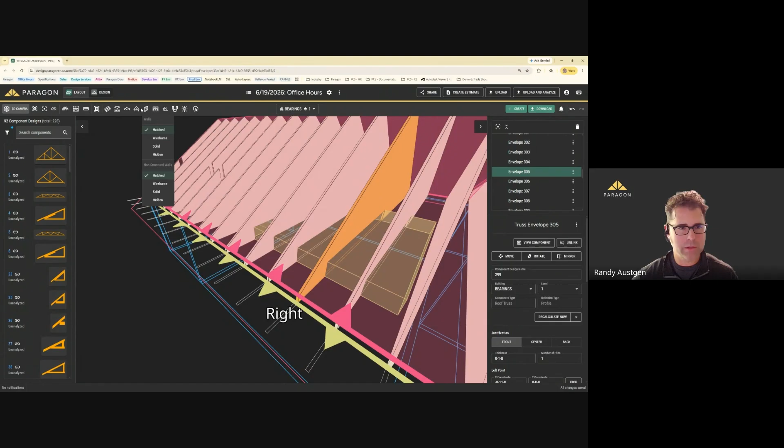All right, so now, what do you think is going to happen with those trusses, right? Nothing. Nothing happened to those trusses. Now, if I look at the solid, that's going to be a different story. So let's go ahead, and what I want to do, I'm going to go back to solids, get rid of these planes. I'm going to grab these bad boys, regenerate the component, look at those designs, and now we're in business.

Nice. Now, does that work the same for vaulted ceilings? Same thing. Okay, cool. So again, the takeaway here is that the truss envelope shape is going to be defined by the ceiling geometry, but if it already has a component designed for it, that's not updated until you tell it to update it. Yeah.

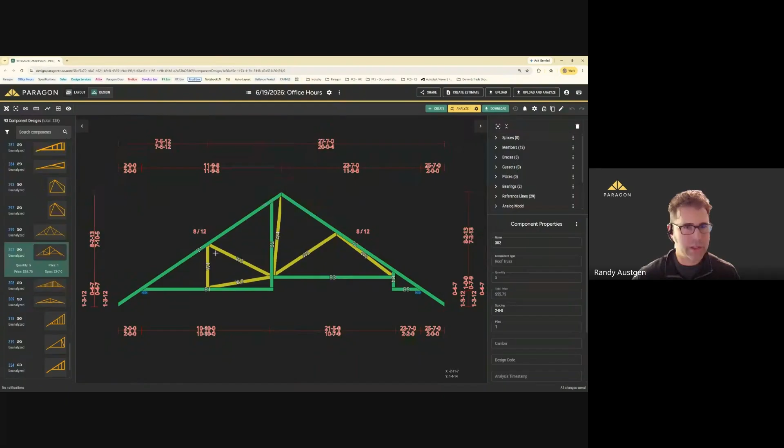All right, and perhaps next go around... I really want to cover this one last thing. It is hugely valuable. I think in the last session, or maybe even 2 ago, we introduced the PDF Underlays. The changes that we've implemented here are so powerful that I want to show them off. And this one I already have multiple PDFs uploaded.

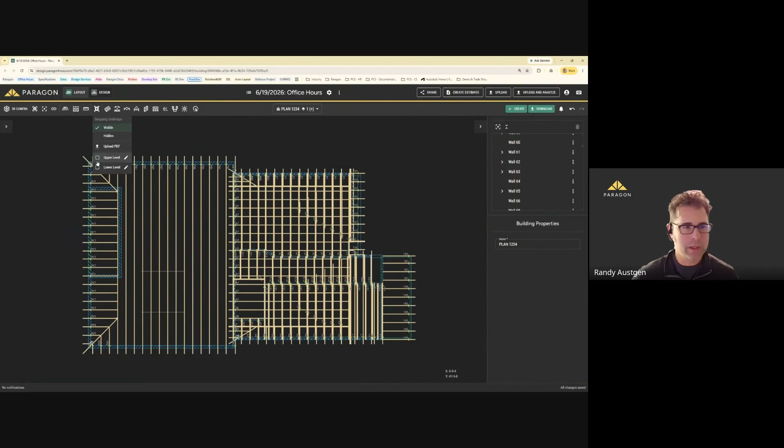For example, a great example here is I've got a lower level layout. I'm shadowing the upper level so that I can see where the tub is, right? Here's a tub up above. I've got a toilet right here on this truss 201. That's probably not going to work, right? Because you need to get that toilet drop right there. The tub would be okay.

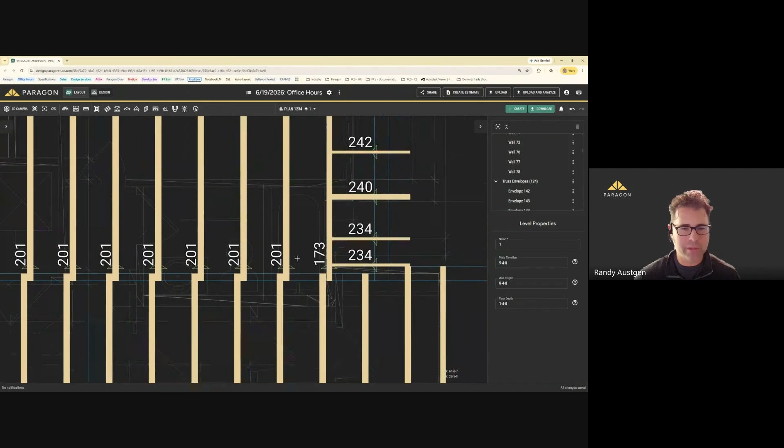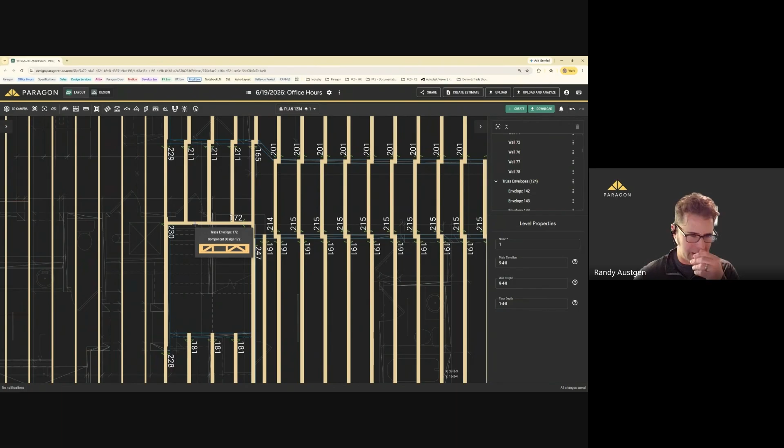We got another lav here. This is potentially not going to work, right? You want to go usually 12 inches off of the wall, and then you need some space. So that's probably not going to work either. So you can really use these underlays and then toggle them on and off as you see fit. Great way to trace walls and to identify the location of your stairwell girders. All right, so please take advantage of that. That is a very powerful new addition that we have here.